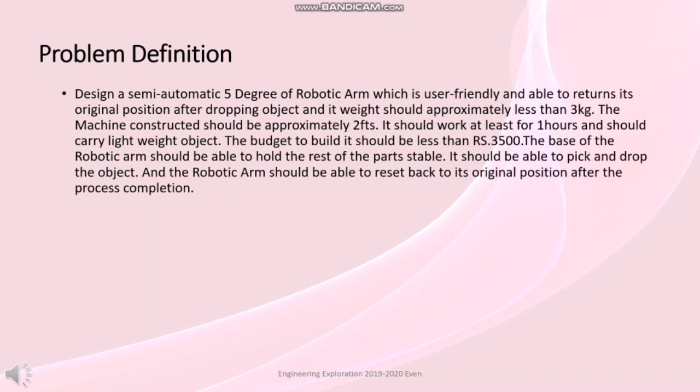The base of the robotic arm should be able to hold all the rest of the parts stable. The robotic arm should be able to reset back to its original position after the process completion. From the problem definition, we identified the functions of our project. They are: the base of the arm should rotate 360 degrees, have an on and off switch to operate, picking and dropping the objects in the assembly line. It should hold the objects.

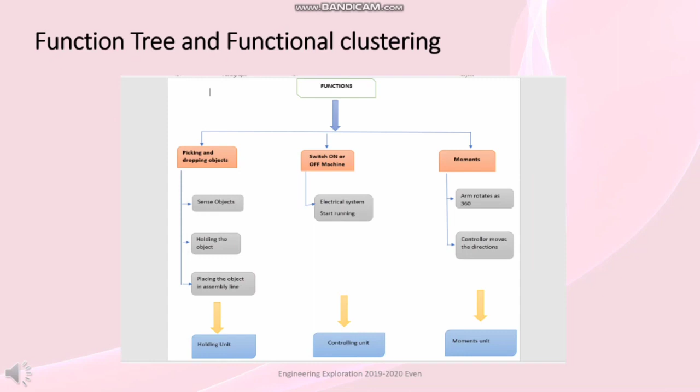For picking and dropping the objects, the arm should sense the objects, hold the objects, and place the objects in the assembly line. This unit is the holding unit. To switch the machine on and off, we use a Bluetooth device. This unit is the controlling unit. For movements, the arm should rotate 360 degrees. This is the rotating or moving unit. Systems of our project we identified are: base of the arm, holding part of the arm, moving or rotating part of the arm.

Generated concept. In generated concept, we select 4 robotic arm designs. In the first robotic arm design, the arm is too long, so it has a chance to break. The second one has more weight and the cost is also more. The third one is suitable, but it does not hold the object correctly. The fourth one is better when compared to the remaining 3.

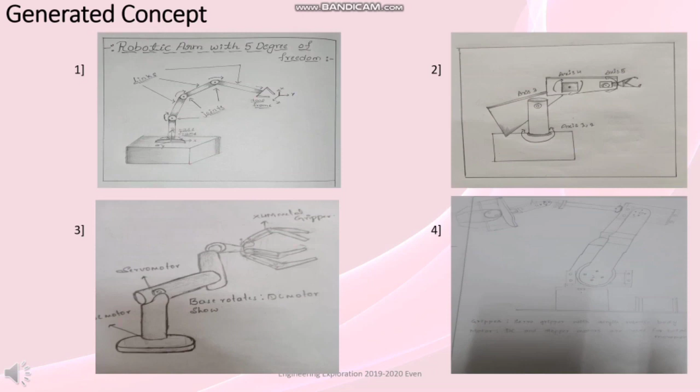In generated concept, we selected 4 robotic arm designs. Of those 4, we selected the fourth one because the fourth robotic arm model is less cost, it easily picks and drops the object, and it also balances the base and arms of the robotic arm. Hence, we chose the fourth model for our robotic arm project.

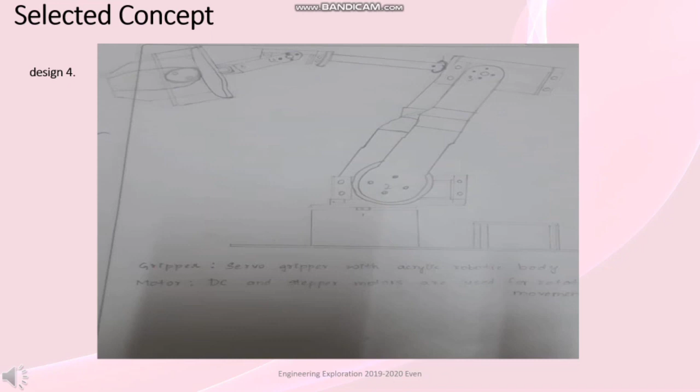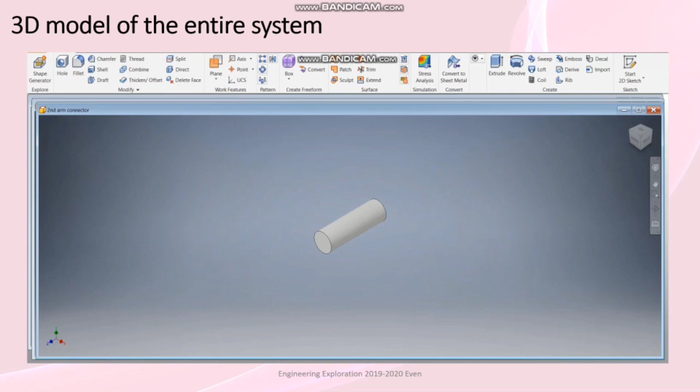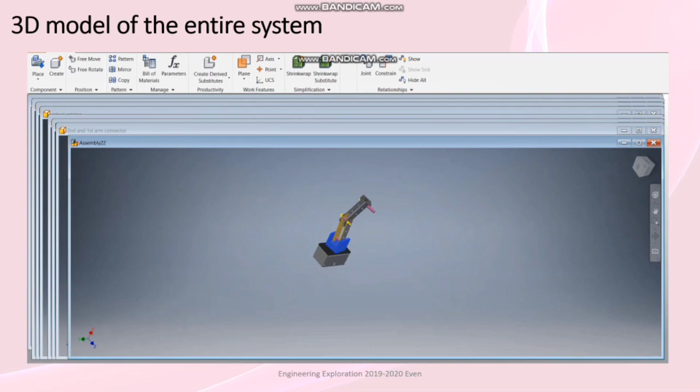Virtual implementation of 3D model. In generated concept, we selected the fourth design of robotic arm. This is the 3D model for the fourth design. This 3D model consists of 4 DC motors and 1 servo gripper. In the base, 1 DC motor rotates 360 degrees, and the second DC motor connects the base and the arm of the robotic arm. It rotates 45 to 60 degrees, same as the third and fourth ones.

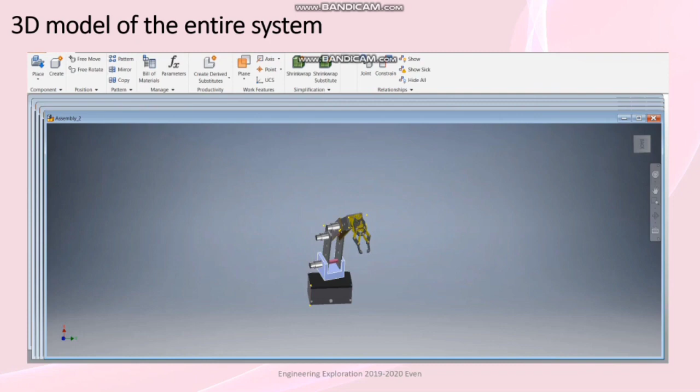Then the servo gripper. The servo gripper helps with picking and dropping the object; it picks the object and drops it in the line. Then how can we make this robotic arm? We can make it with acrylic sheet or foam sheets. The suitable one for our project is acrylic sheet. The base is made of foam sheets and the arms are made of acrylic sheets. The servo gripper is obtained in shops.

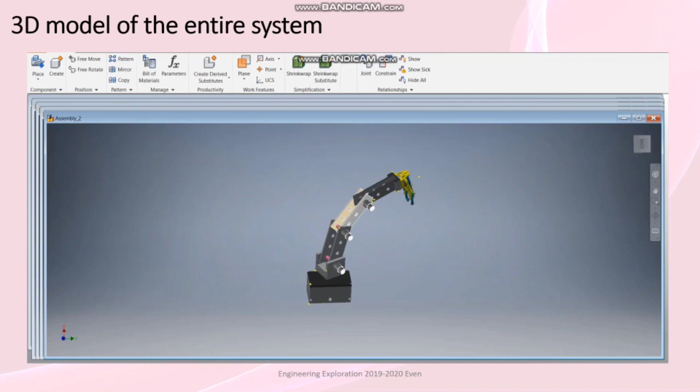How does this robotic arm work? First, we can use it by Bluetooth or buttons. The base rotates 360 or a total of 180 degrees. Then the second DC motor rotates 45 to 60 degrees, comfortable to pick the object. The third and fourth DC motors work the same. Then the servo gripper picks the object with grip, comes back to this position, then drops the object in the assembly line. Then the robotic arm comes back to its original position. This is the working of our robotic arm for our project.

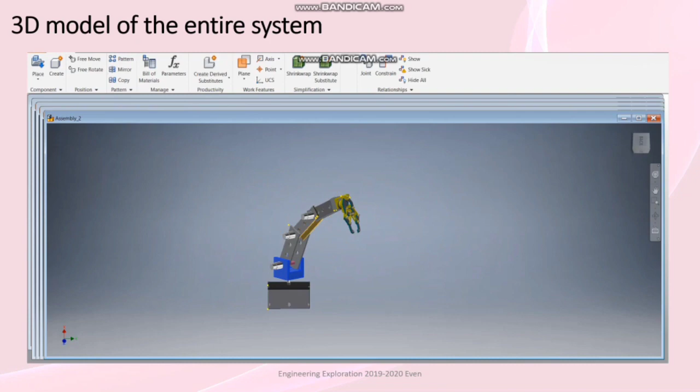Virtual implementation of circuit diagram. This is our circuit diagram for our robotic arm project. It contains 4 DC motors, 1 servo motor, Arduino, connecting wires and also other components.

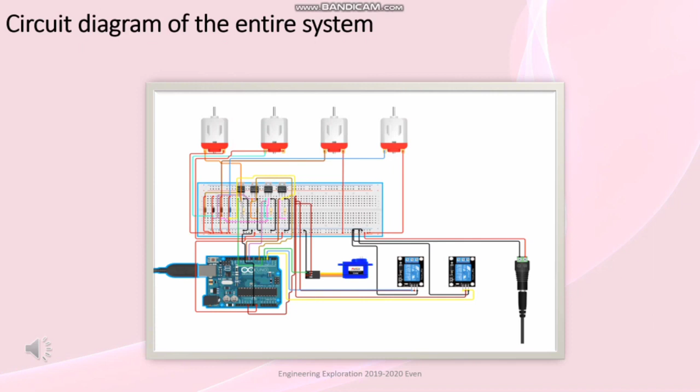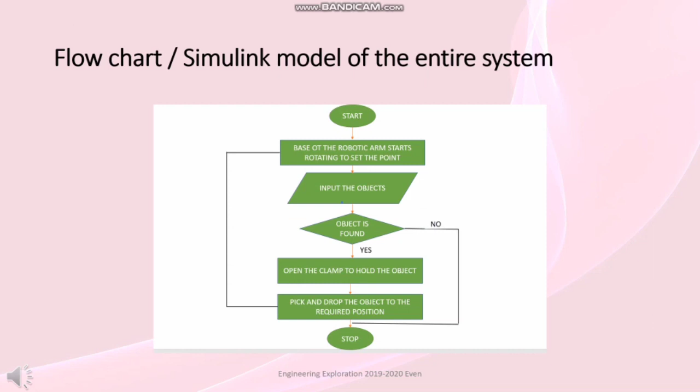I am Kirtana and I want to give the information regarding the flowchart. When we start the robotic arm, the base of the robotic arm starts rotating at an angle of 360 degrees. Then we have to insert the object. The sensor senses the object. If the object is detected by the sensor, then the clamp of the robotic arm gets opened to hold the object. We can pick the object with the help of the clamp and then place it in the required position. If there is no object, then the robotic arm stops rotating.

Next comes the bill of materials. We require one servo motor of MG995 model, an Arduino Mega AT2560 microcontroller, a breadboard, male to male and male to female connecting wires, and 4 DC motors which rotate at a speed of 60 rpm. We also require 24 nuts and bolts made of steel alloy. The robotic arm is prepared by cutting and drilling acrylic sheets, and the stand is prepared by cutting and drilling foam sheets. Using all these materials, we can prepare a 5 DOF robotic arm.

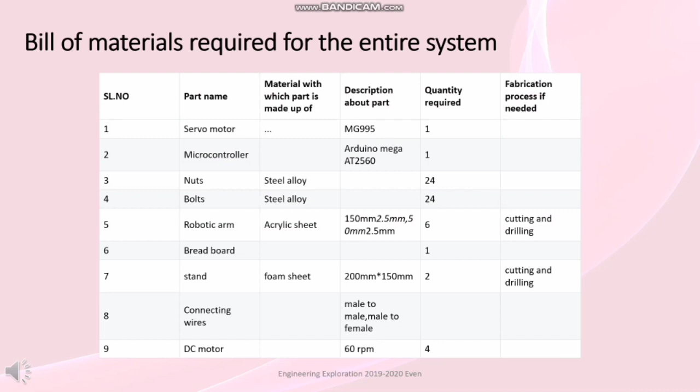Next is motor sizing and battery sizing of the entire system. This contains all the details of the DC motor and servo gripper. The base DC motor rotates at a speed of 30 rpm. The arm DC motor rotates at a speed of 10 rpm. The length of the motor is 25 millimeters and the diameter of the motor is 36 millimeters. The brush is made of precious metal. Gear head diameter is 37 millimeters and gear head length is 21 millimeters. The output shaft is centered. Shaft diameter is 6 millimeters and shaft length is 22 millimeters. Gear assembly is of spur type. The total weight of the motor is 100 grams.

Next are the details of the servo gripper. The servo gripper has an operating speed of 0.22 plus or minus 0.01 seconds per 60 degrees at 7.4 volts. The running current is 1400 plus or minus 30 milliamperes at 7.4 volts. The stall torque is 19 plus or minus 0.20 kg per centimeter at 7.4 volts. Stall current is 3000 plus or minus 50 milliamperes at 7.4 volts.

The running life of the servo gripper is greater than 1,80,000 turns. The temperature range of the servo gripper is minus 10 to plus 50 degrees Celsius. Operating voltage should be between 4.8 volts and 8.4 volts. The servo gripper consists of dual ball metal bearings, and the length of the connecting wire is 32 centimeters.

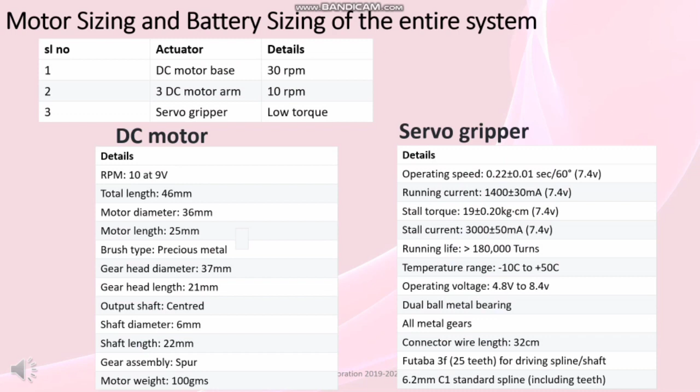Next is the functional specifications of the entire system. The base of the robotic arm rotates at an angle of 360 degrees. The arm rotates at an angle of 90 degrees. We can pick the object with the help of the gripper. As the gripper is capable of contraction and expansion, it is easy to pick an object. We can release the object and place it at a particular position by expanding the gripper from 60 degrees to 120 degrees.

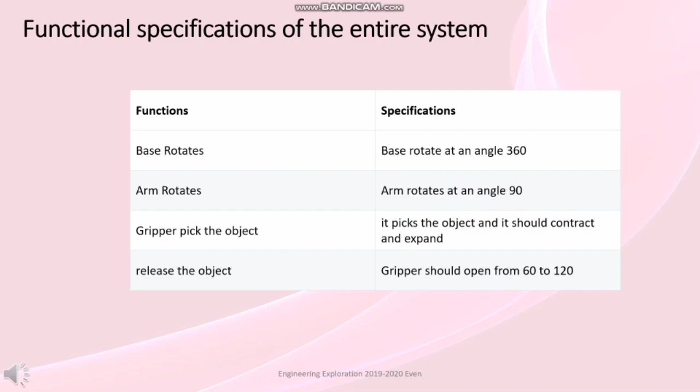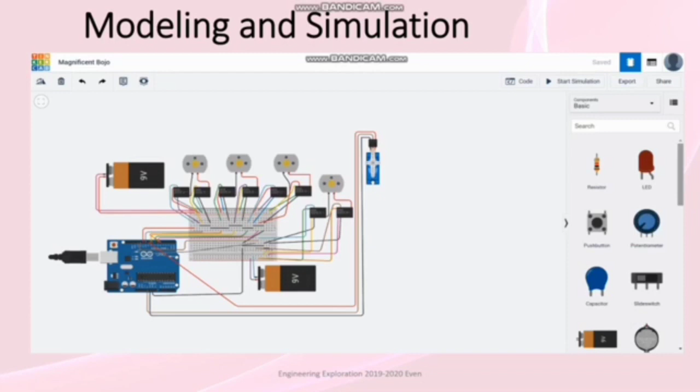Our project is a 5 degree of freedom robotic arm, using 4 DC motors and 1 servo gripper, 2 9-volt batteries, 1 Arduino and 1 breadboard, and using the 8 relay module, because 1 relay module gives only one output. In our project, 1 DC motor rotates in both directions, clockwise and anti-clockwise. So I am using 2 relays and controlling 1 DC motor clockwise as well as anti-clockwise. Same using the 8 relay module. First DC motor using the 2 outputs, 5, 6, 7, 8, 9, 10, 11. These are the outputs for output pin mode.

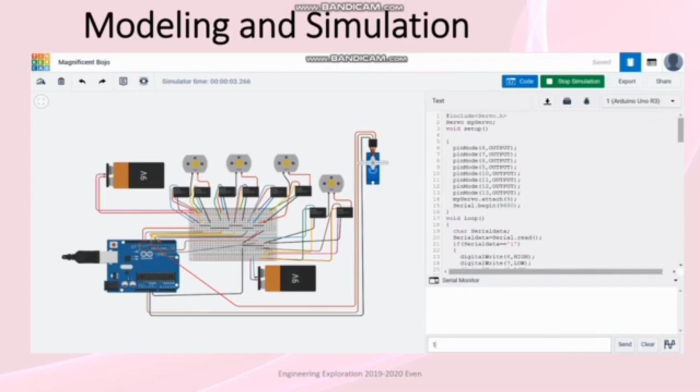And the code for our project. First run the code. Pin mode 6, 7, 8, 9, 10, 11, 12, 13. These are the outputs for the DC motors. First entering 1, the first DC motor rotates clockwise. Entering 2, the second DC motor rotates clockwise. Entering 3, the third DC motor rotates clockwise. Entering 4, the fourth DC motor rotates clockwise. Entering 5, the servo gripper rotates from 90 degrees to 0 degrees.

Entering 5, entering 6, the first DC motor rotates anti-clockwise. Entering 7, the second DC motor rotates anti-clockwise. Entering 8, the third DC motor rotates anti-clockwise. Entering 9, the fourth DC motor rotates anti-clockwise. All arms come back to the original position, and all DC motors are controlled to rotate a certain angle, using delay to control how the DC motor rotates.

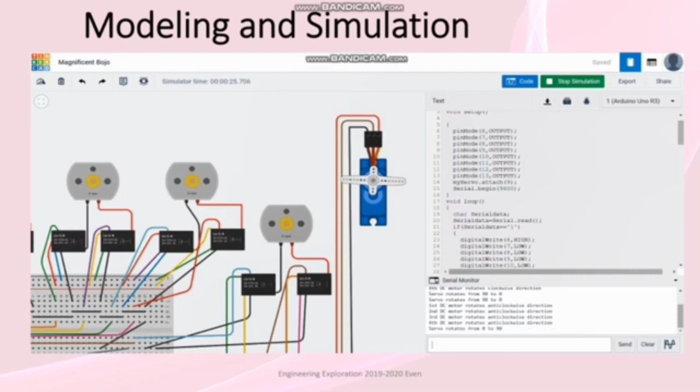Entering 0, the servo gripper rotates from 0 degrees to 90 degrees. It releases the object and places it on the assembly line.